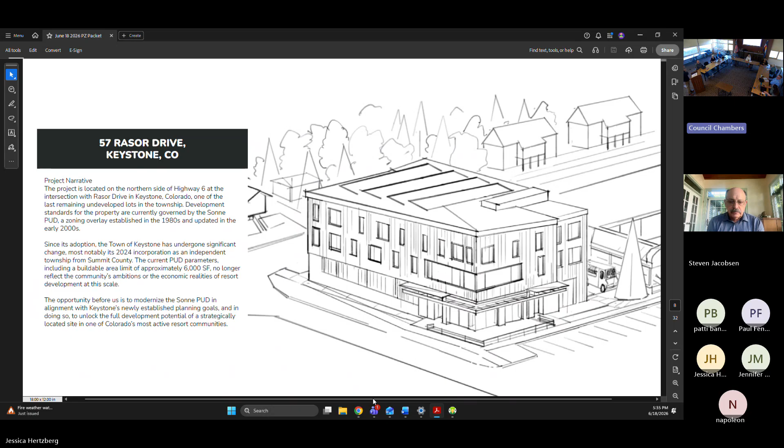Thanks for coming in tonight to listen to our presentation on this project at 57 Rasor Drive. It's a project we've been working on figuring out how to approach over the last 6 months or so. We've been working with Jess a little bit and some other people to help guide us as to what the best steps are for redeveloping this lot.

The first thing that came to mind when we started working on it was the rules of the existing PUD. It's a pretty interesting description they have for the lot, limited to 6,000 square feet total built area, but with a height of 41 feet, which, when I first read that, I was a little bit confused. I didn't know what they had planned for this, if it was going to be a gondola tower or a church, or I don't know. That height limitation really caught my attention. Actually, Jess, you can go to the next slide.

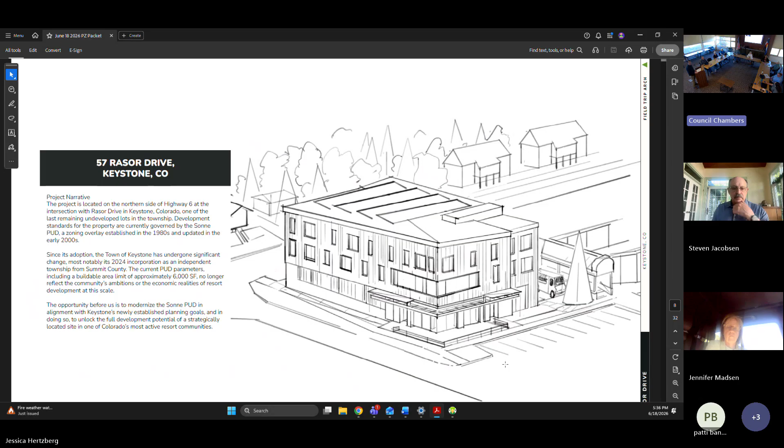So just trying to orient ourselves in this, where this site is. It's actually really close proximity to the Peru Express, to the base of Keystone. It seems like it's closer to walk to it than to drive to it. And it's sitting right in line, with a pretty direct path to get to the lift, as well as other trails on the south side of Highway 6.

So just getting orientation, parking, major landmarks, things like that in this map.

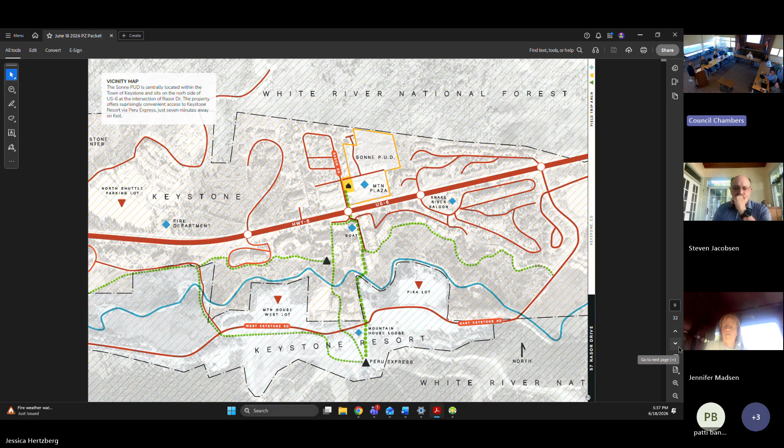So, seeing potential to add to that, and potential to see if an increased density could benefit existing businesses as well as new businesses that would be housed in our proposed project. So, 5-minute walk to the gondola, 10 minutes to A Basin from here, 11 minutes to Silverthorne, pretty centrally located within Keystone itself.

So yeah, we can go to the next slide. All right, so for the existing PUD, I think it was originally written or agreed upon in '82, updated in the year 2000. Lots changed up here over those years.

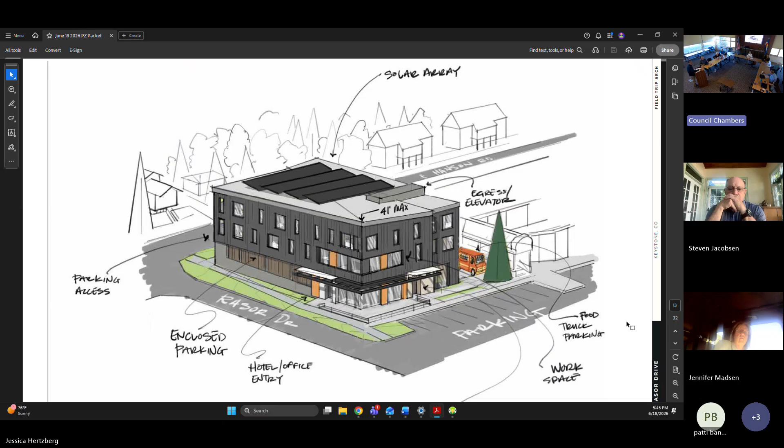This essentially maxes out the footprint that is allowed with the existing setbacks. We have a 20-foot setback to the rear between the existing shopping center and the new building. We're going to play around with that and see if there's any way that we can make that kind of a special place. Call it the alley.

Right now I drew a food truck in there, so maybe we can have a taco truck in there during the day, and then it switches over at night to another business that is servicing the tap room, which is the other ground floor space that we're proposing.

What it is, it's a 3-story mixed-use development. We've got solar panels on the roof. We've got 10 condo hotel units. We have an office space, like a co-working space, and an amenity space on the second floor to service the condo units. On the ground floor, we have parking in the rear. It'll be accessed off of Hanson Road.

And then the tap room facing Highway 6 and the parking space.

One of the things too, when I was starting to look at the PUD, is there's these 9 spaces that are just sitting in front of that lot. When you start to think about how this development would come to fruition, it's sort of, I don't know if it was an oversight at the start or if it was planned for the future and never got put into words, but it seemed to me that those 9 spaces were maybe intended for that lot.

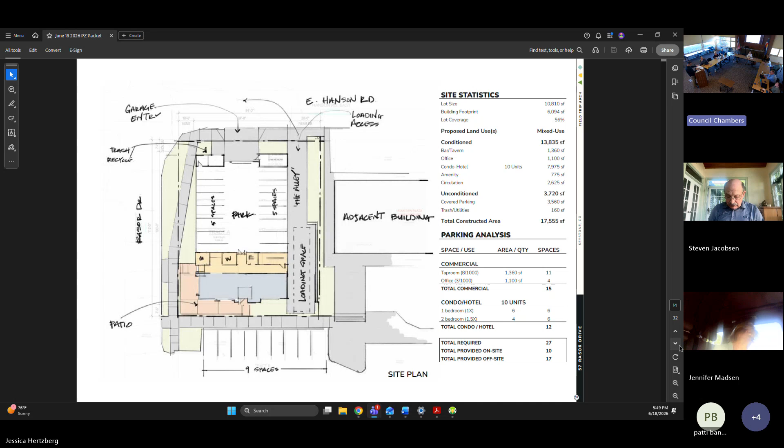Basically the same as the previous page, but when we go to the second level plan, you can start to see how the rest of the building is going to be divided up. So this floor plate, we've got 4 units here. We've got 3 1-bedrooms and a 2-bedroom on the back corner. 2 egress stairs, elevator access, mop closet, and then the space we're really excited about is the workspace.

So the idea for this space is, who can it serve? I think the local community obviously can take advantage of this space. Rent a desk, rent a cubicle, whatever you need for doing business. The other aspect of this that I think is really neat is that we can cater to someone who is up for the day, up for the week, up for the weekend. You need to have a meeting, go and do your Zoom call, and then shuttle picks you up out front

and drops you off at the mountain. So just trying to figure out different ways to allow people to enjoy the mountains without having to go on peak hours. I don't think anybody really likes driving up on the weekends. So trying to accommodate different ways of getting up here.

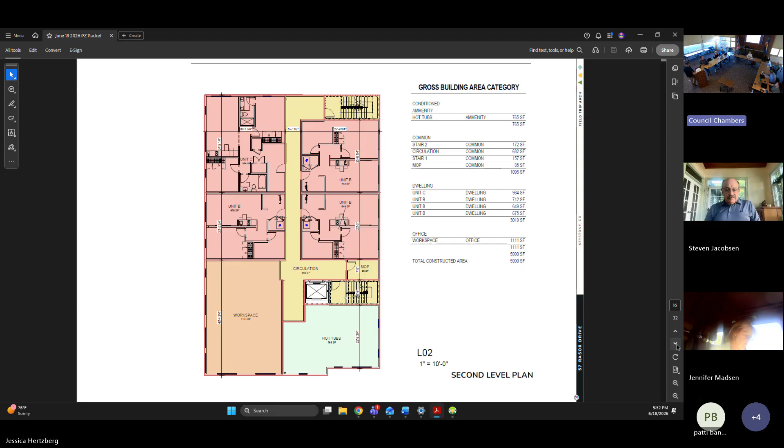The next space, hot tubs, inflatable hot tubs. I think it could be a bunch of different things. Maybe we have a sauna, cold plunge, locker room for getting ready for skiing, but just an amenity to the condo hotel units. All right, up onto the 3rd floor.

The idea with these spaces is that you are accommodating all different types of users in a way that you can have a couple come up, an individual, a family, and also accommodate all the gear that we're bringing up. So we had looked at putting lockers or like mini garages in the garage for your gear, for storage of bikes, snowboards, skis, etc. And it proved better to actually provide that kind of storage up in the units themselves. So each unit, when you walk in the door, you can kind of see a bike hanging there. We have this big kind of in-unit garage where there'll be a floor drain. Your stuff can sit there, dry off, drain out, and it's right there, ready to go for the next day.

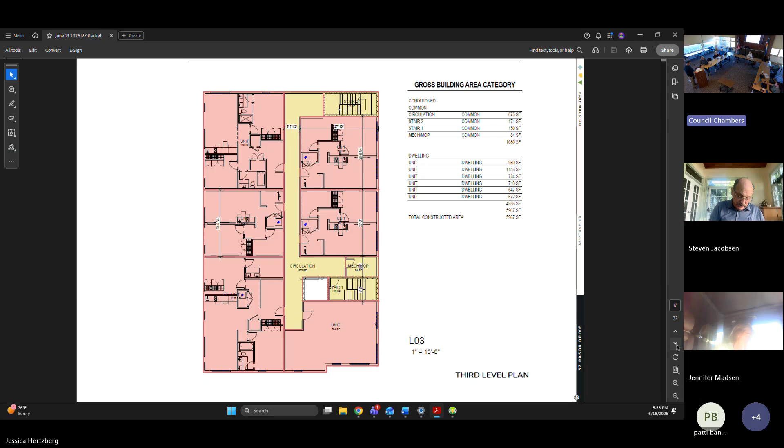All right, and then the roof. Being on the north side of Highway 6, we have excellent solar exposure there. And we have a huge roof. So right now, we're showing a layout. This is almost a 2,000 square foot solar array. I can't vouch for how much that'll do, but I can say that our last 3 houses have all performed at net zero, and that's going to be the goal for this one as well.

So solar is a part of that equation. The other part is the construction type and the equipment used for heating and cooling. All that stuff we will be looking into and tailoring to the overall performance of the building as we get further into design.

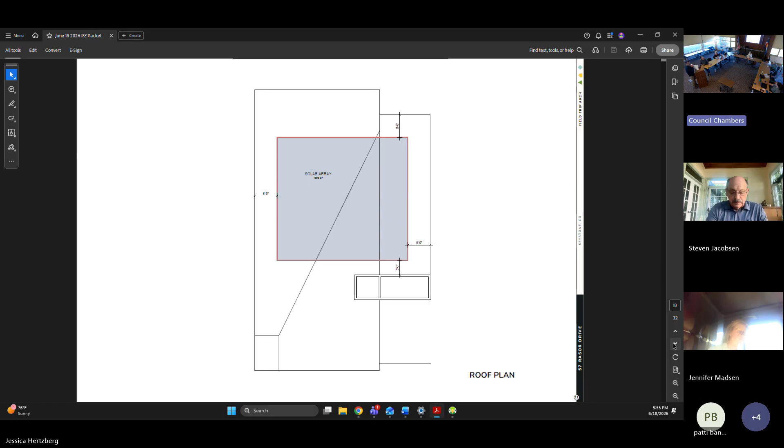So, next page. Some looks at the building. So this is what it would appear like from Rasor Drive. Working hard to stay under that 41-foot max height, but also not just do a box. So what we have is a really, really gentle sloping roof that sort of leads your eye over to the mountain. And then some really clean and modern lines with the windows. The kind of wooden looking screen that you see is, that's the parking garage.

We're kind of going back and forth between if it's like a partially open, partially enclosed, or if we're going to fully enclose it and try to capture the heat from vehicles to kind of help with the overall performance of the building. The doorway you see here would be the doorway into the lobby for the hotel. And then you can get to the tap room from there as well. All right, so what do the units look like?

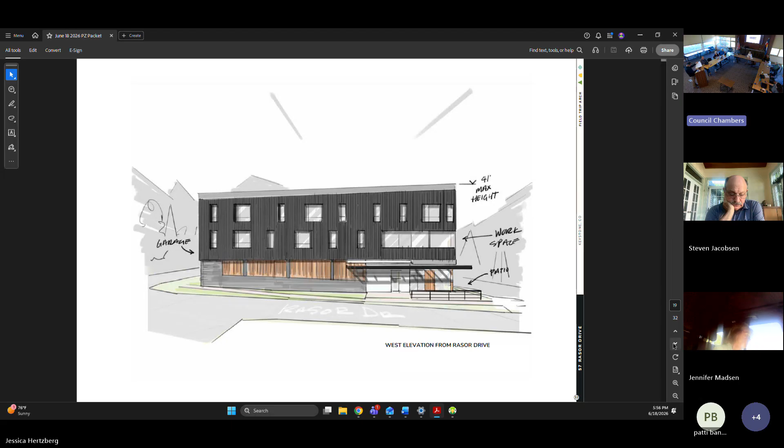So this is a 2-bedroom, 2-bath unit. We have a primary bedroom with a walk-in closet, walk-in bathroom, kitchen, dining room, living room, sort of all the basic amenities you'd find with any 2-bedroom unit here in Keystone. The difference is we have this gear storage and mudroom area. We're really seeing that, in our houses that we've designed as well, as such a key area in the house. We want it to be someplace where you can put your bike up and hang it, and have it be like when someone comes over, they say I love your bike, that's an awesome bike. Or your skis, seeing the gear as almost like artwork or a fixture in the unit.

In-unit laundry, yeah, pretty functional unit in a small footprint.

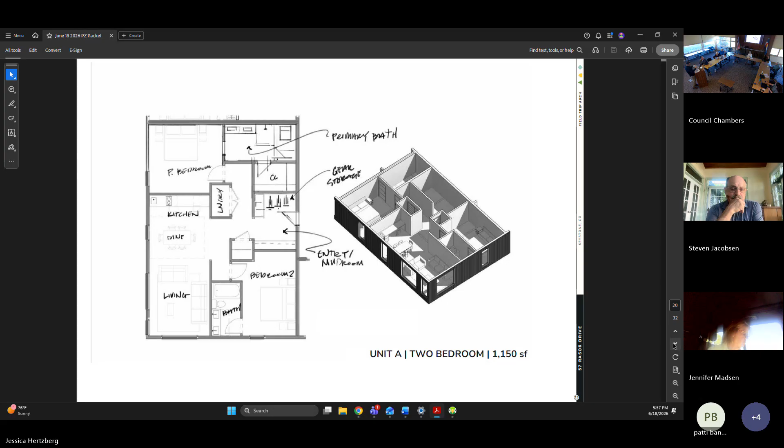These 1-bedrooms, I'm a big fan of. 1-bedroom, 1-bath, with a kitchenette. We're not proposing a full kitchen here, but a sink, dishwasher, and a hot plate. Again, designed for someone who's up for the day, up for a few days, a long weekend, but has all the things you need within the unit to get by. In-unit washer, dryer, shower, bathroom, bedroom, and of course views out to the mountains.

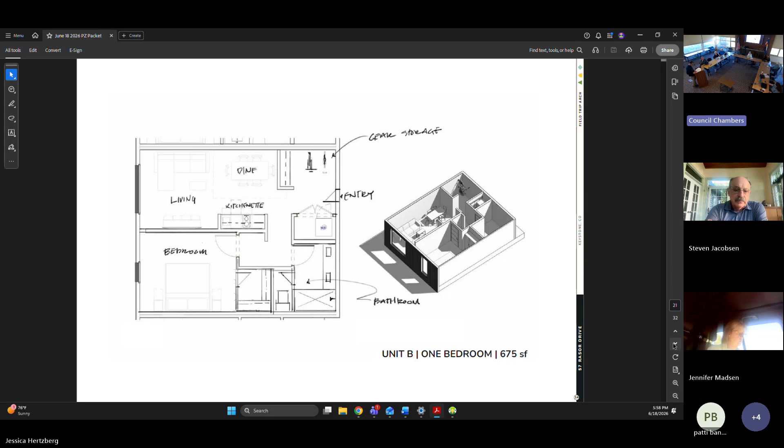From there, we can move forward with a lot of the materials needed for the Class 5. We have a civil engineer ready to go once we tell him what kind of building we're looking at designing. We've also been trying to get on the schedule for a meeting like this for a while now, to understand the temperature in this room, what the feeling is about something like this, and if there's anything we should be considering that we're not.

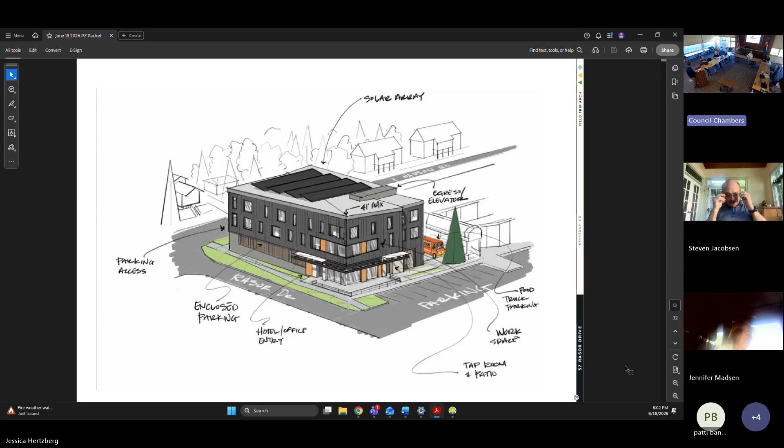A little one, when I looked at Unit A, the 2-bedroom, it's labeled kitchen versus kitchenette in the 1-bedroom. Are you planning, how do you define the difference between kitchen and kitchenette? So the kitchen would have a range and oven, as well as a full-size refrigerator, a bigger sink, dishwasher. The kitchenette is kind of like an under-cabinet refrigerator, sink, and just a little 2-burner hot plate kind of thing, and obviously a microwave.

Thank you. Diane, so you just said you understand the parking, but I don't. No, I don't really understand. I'd say that's going to be something they're really going to have to explain. I would like you to repeat what you said though, because I couldn't follow all of it and I'd like to make notes. Yeah, we want to go back to that.

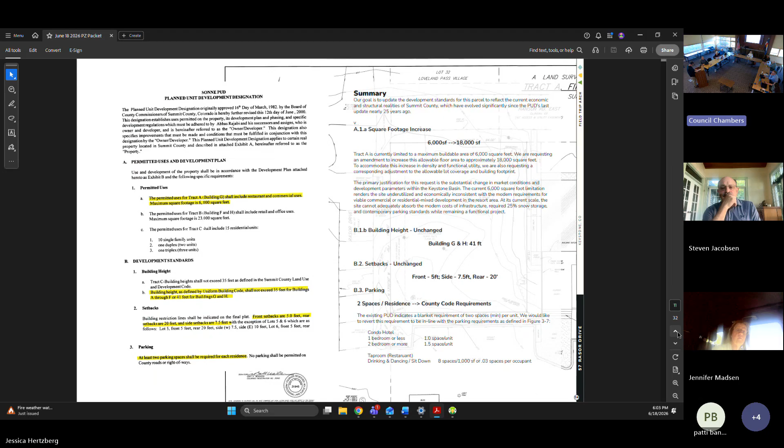So these numbers were pulled from the development. For example, when talking to someone about purchasing parking spaces at Mountain Plaza, the owner of that building might sell us those 9 spaces. They have more than 9, maybe 20. We need about 20 spaces and we've talked with him about that. He is open to selling that many, so any shortage we have in parking, we feel we can address with a deal with that owner.

The parking lot's full now, so for him to sell it will be interesting. He's told us he has extra spaces in the back. Yeah, maybe, so that's still a possibility.

But I still want to write down what your plan is here. The plan in terms of parking: you've got 10 under the building, we have 9 in front. We need 27, so there's 8 more spaces we need to buy from him, in addition to those 9 in front of the building. You said something about 27.

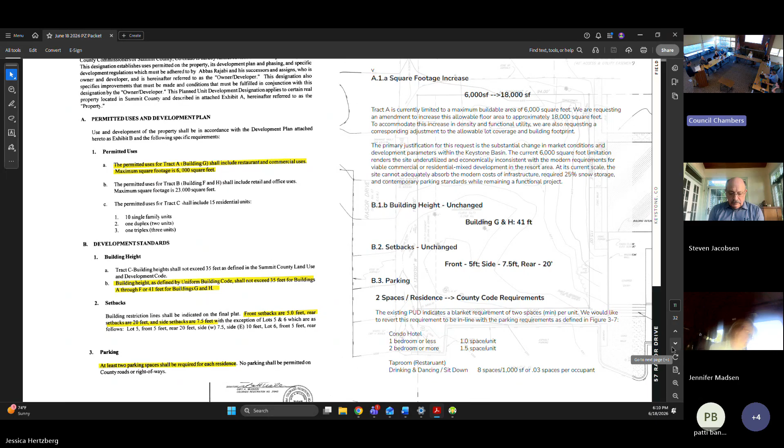So yeah, that's what I'm referring to. I mean, you being the community at large, I'd love to hear your thoughts on it as well. But that language is coming from conversations I've personally had with people around there.

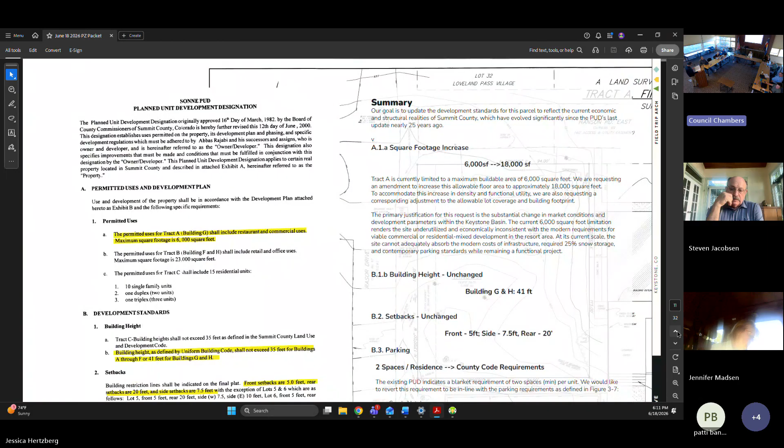Thanks. The second area is the general question about density. On the PDF, page 11, you talk about the modern costs of infrastructure and change in development parameters. I think you covered the modern cost of infrastructure half of that question just now, but I don't understand your justification for the proposal about the change in development parameters. Help me understand that part of the note on page 11.

I think what I was speaking to before is the same thing: it is expensive to build up here, and to pencil a deal, there's an input and output, and with costs going up, you get squeezed more and more with what you're building. So is it accurate to rephrase what you said, that an increase in scale of the number of units and higher density allows the cost parameters to really be viable? Yeah. Is that effectively what you meant by development parameters, i.e. cost? Yeah. Thanks.

Tim? I just want to make sure I understand when you say condo hotel, exactly what you mean by that, and is that strictly commercial? Because you said you're not changing the permitted use to include residential. So condo hotel is a block of units that are owned by individuals but managed by a hoteling service. So owners of those units have access to the rental and booking fees. They also have access to use the unit as they need.

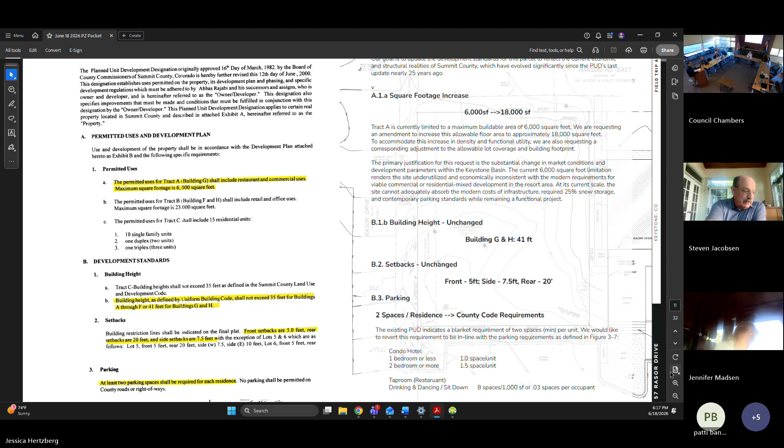I'd like to understand more about the space on the side of the building that you'd use for different reasons. One thing I heard was delivery. Does that mean you'd have a semi back up into that space? Has there been any math done on whether that's physically possible?

That would be part of the civil scope when we get there. Is it drive-throughable, like can you drive from the back to the front? Currently, no, there's a curb there. We've looked at that, but it would also eliminate three parking spaces, so we haven't done a turning radius study for that yet.

I think that would be interesting to understand, because if not, would the semis essentially park on the road in front of the hotel? Or, if you have hotel guests and the entrance is right there on the side of Rasor Drive, most hotels have an entrance where you pull up and someone hops out to check you in. Does that mean people would be parking on that road while waiting?

Not necessarily. With these condo hotels, and everyone's probably stayed at an Airbnb, the check-in process is mostly done on your phone. We're working with a developer as a consultant who has a condo hotel down in Denver with no lobby. All the booking and check-in is done online, the locks are phone activated, and that's the extent of what they need for that type of business.

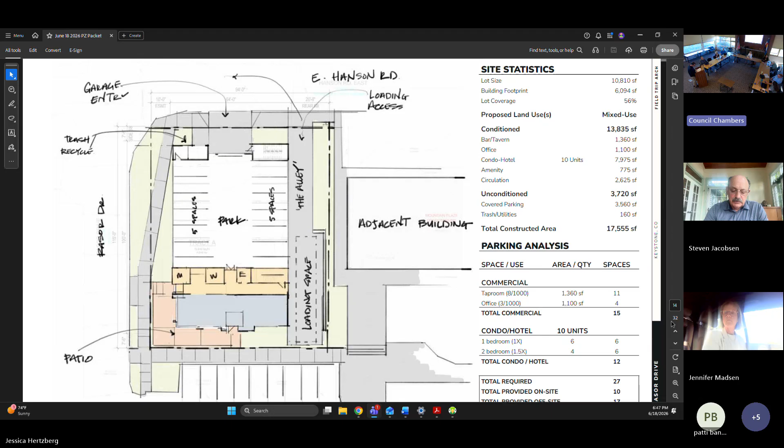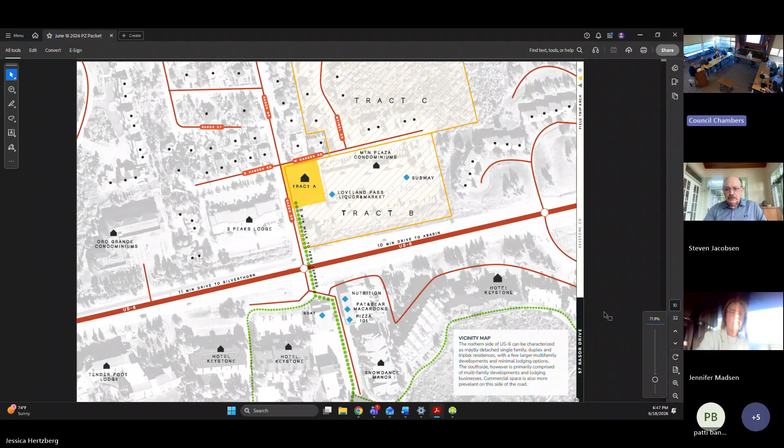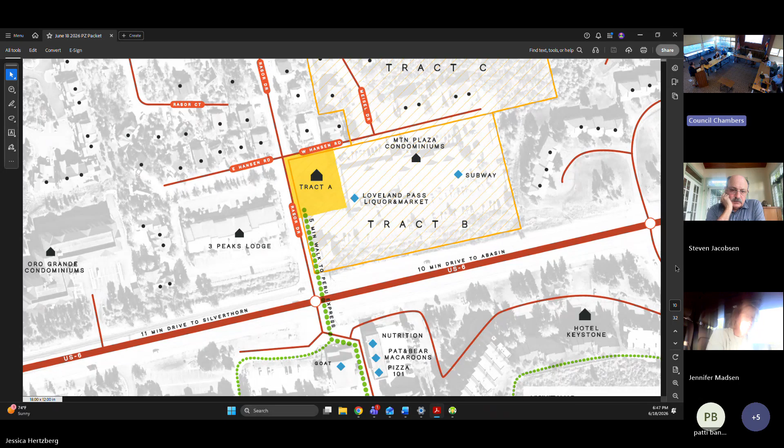Thank you, Pete. Jessica, could you go to the second slide? Go down, down, down. Okay, stop there. So on that slide, we can see tract A, tract B, and tract C. And in the PUD, it says tract B is retail and office, which we know it is. And tract C says 10 single family, 1 duplex, and 1 triplex. Do you know if it's built out? I have that information, but not readily available. I do have that information.

See where up above Mountain Plaza, you can see those 4 dots. See, it says Mountain Plaza and then the road, and then up above there's 4 dots, below the words tract C. Yeah, so there's 4 condos there now. And then on this side of the condos, there's a whole row of parking that the Hilton leases from Mountain View.

So does anyone know how long they have rights to that? But that parking is part of tract B that's owned by Mountain View Plaza. Oh, okay, even though the line doesn't look like it. Well, here.

I'm not 100%. It's more just me trying to understand, because when I looked at it, there's a lot of space. It's like a really wide road, and they've got parking on both sides, but in a way there's room for more stuff. So I was trying to figure out, did they just make that area really wide for some reason, or is there still more that's going to get put into tract C that I don't know about?

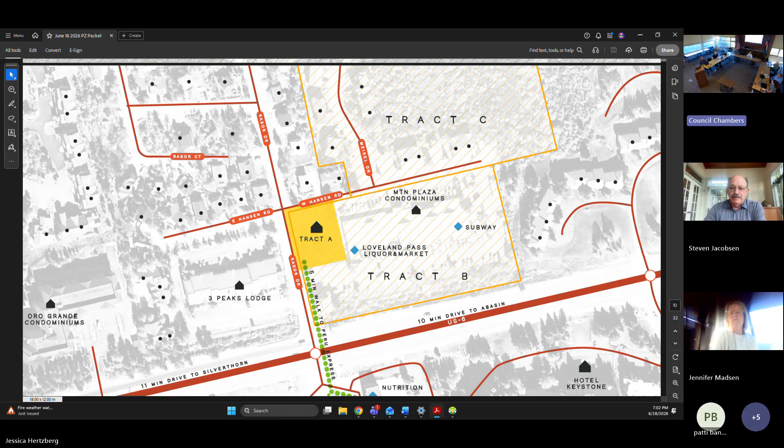I was tracking that a lot for a while.